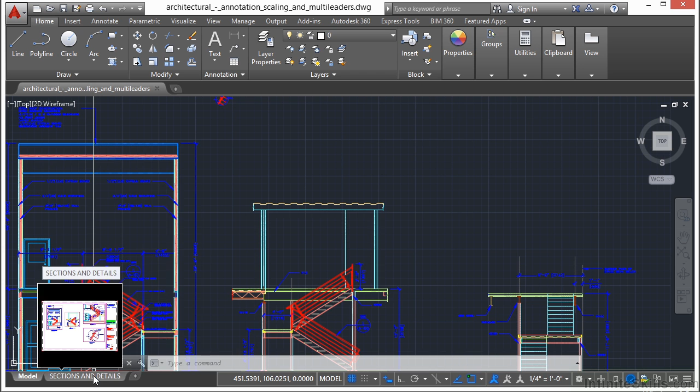So to start, we're going to make a new layout tab. To do that, just right-click on the layout tabs and click New Layout. That will create a tab called Layout 1. Page name is fine for right now. So let's activate that tab by clicking on it. Just go to it. And we have a viewport already set up.

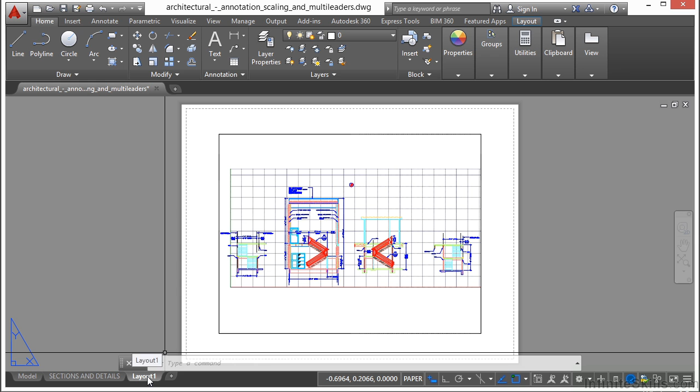Now let's go to the Page Setup Manager. It's real easy to get to. Just go down to your Layout tab and right-click on it and go to Page Setup Manager. Now this window allows you to either pick a page setup already in the drawing or make a new one. Any names that you see down here with asterisks on it, as we have here layout and sections and details, are paperspace tabs. Any others that you'll see can actually be assigned to it.

Right now we don't have any page setups in here. So in order to use our page setups, we're going to have to create a new one. So click on the New button. Let's give this a name. I'm just going to call it Page Setup Example.

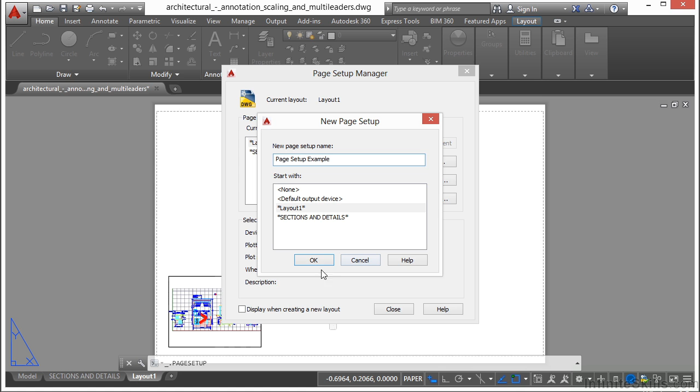Now what you want to do with the names is give it a name that defines or describes what's going on. So if you're printing a black and white 8.5 by 11, give it a name similar to that. Keep them short, but make sure they're clear and well defined so that anyone using them knows and understands exactly what it is you're trying to do with that page setup. So give it a name, click OK.

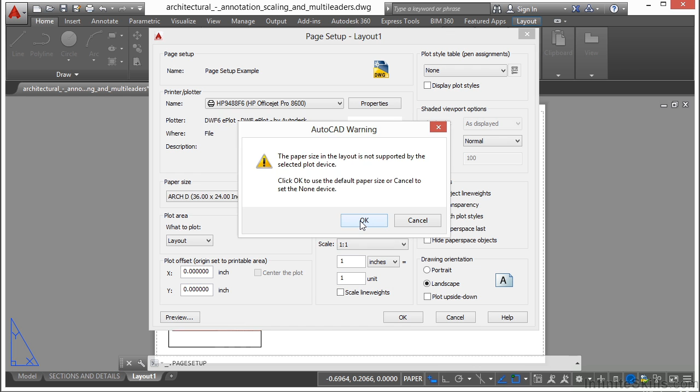Now we just go through all of the settings, just like we would when we were normally printing. So I'm going to pick my printer first. Since I only have one real printer to choose from, I'm going to pick it. And this gives me a warning. It says, hey, my page size is too big, and I realize that. I'm clicking OK, and it gives a description of what's going on here. Now I'm going to pick letter size for my paper size, and I want to pick extents. I want it to center the plot, and I want it to fit to the page.

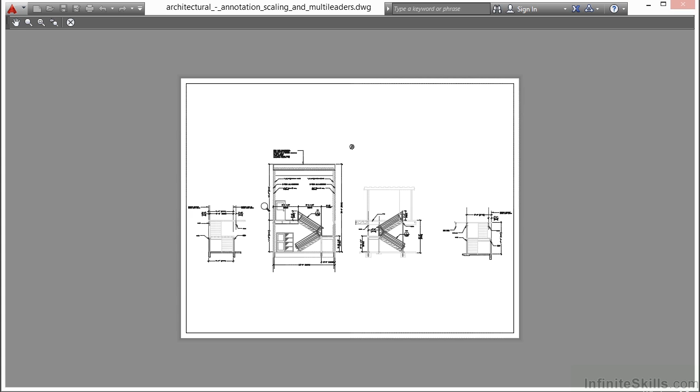When you're ready, click on this preview, and the preview button will show you exactly what it's going to look like. See, that fits everything into an 8.5 by 11 size sheet. Works perfectly for me. Now I can zoom in and out with my scroll wheel. I can also pan with my scroll wheel. Or if I right click, I can get to pan and zoom, or zoom window, or zoom original. Or when I'm finished, I just click exit.

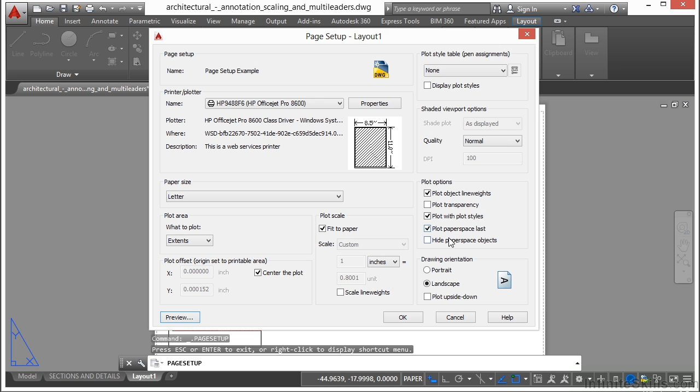Now when everything else is okay, make sure my portrait and landscape is set up. I'm not going to use a CTB file. Everything else here looks good. I'm going to click OK. And now my page setup has been created, and now I can apply it to this paperspace tab. So what I do is I select it, and I hit the Set Current button. Now when you do that, you'll see here it says Layout 1, and in parentheses it has the name of the page setup. That means it's been assigned to this paperspace tab.

This paperspace tab does not have a page setup at all. That's okay. I'm going to create one more, so I'm going to select New. Now you notice that I selected this page setup before I clicked New. This works just like it does in any of the other style creations, dimensions, text, etc. It will copy these settings, and then I'll just be able to tweak it however I want.

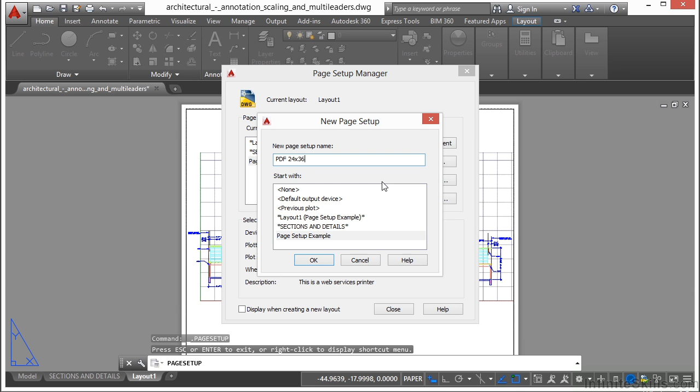Well, I'm going to call this PDF 24 by 36 because that's what I'm going to create. With this page setup, my drawings will be printed not to paper, but to a PDF file. And it will be full size, 24 by 36. So I'm going to click OK.

AutoCAD, by default and out of the box, comes with several settings. I have some programs that I use, like Snagit, OneNote, and Nitro PDF Creator, that will allow me to print to those file types. Also, you have a Microsoft XPS document writer. You should have that if you're running Windows, which you should be. If you have a fax printer set up, or your default Windows printer, you can print to those types of

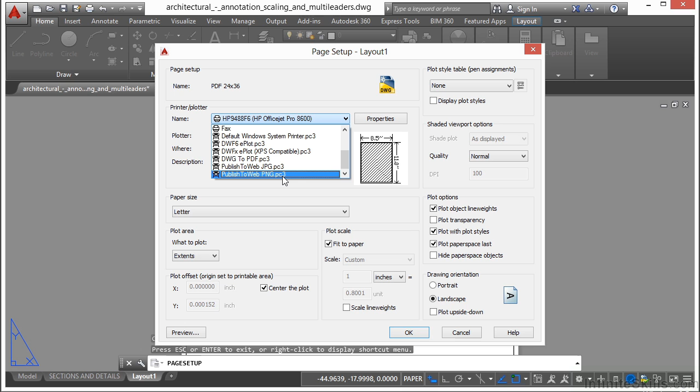files. AutoCAD itself comes with settings to print to a DWF file, a DWFX, a PDF, a JPEG, or a PNG file. And those are these options here. So instead of sending the document to a piece of paper, it sends it to one of these electronic file types. So this is a great way to share your drawings via email. Well, I'm going to use the DWG to PDF file.

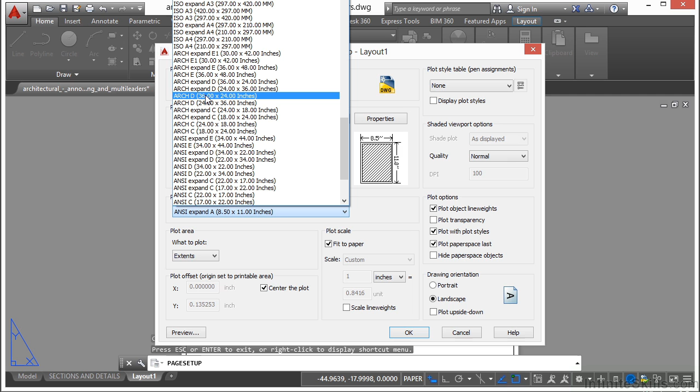I have a lot of options here available to me. Now, this is an architectural D size drawing, a 36 by 24 size sheet. Now, you see I have two options here, 36 by 24 and then 24 by 36. Well, this drawing is a 36 by 24 in reality. It's 36 wide, 24 tall. And the first number in your AutoCAD printing is what's going to be the width. So that's what I'm going to pick, 36 by 24.

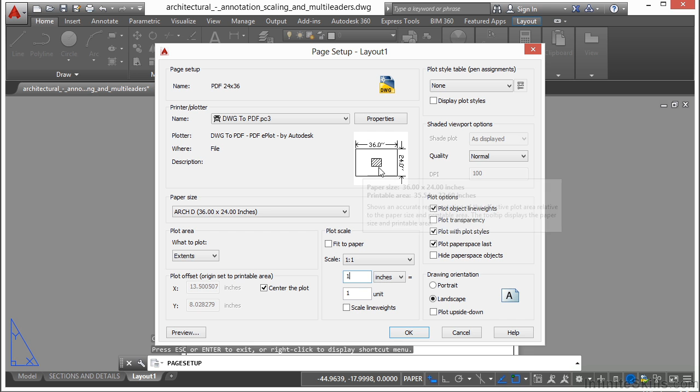Now I'm still set as the drawing to extents, and this is set to center. This is set to fit to paper. I'm going to turn that off, change my units to 1. And you can see here, this drawing is not really set up to be printed to that size. And you're going to find out that this happens to you quite often, where you think it's set up to be a certain way, but it really isn't. If I hit preview, you can see how small that is.

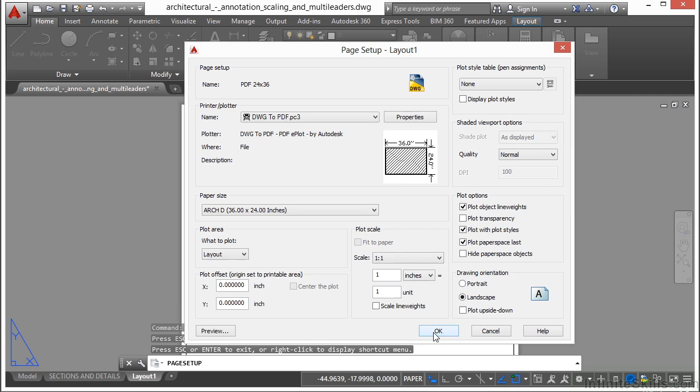What's happening here is that this paper space tab is set up to be 8.5 by 11. And that's okay, because I'm not going to apply it to this paper space tab. I'm going to apply it to this other one. So I am going to set up to layout 1:1. Now it's going to be 24 by 36 when I use this setting. I'm going to click OK. And now it's here as an option available to me. I'm going to click close.

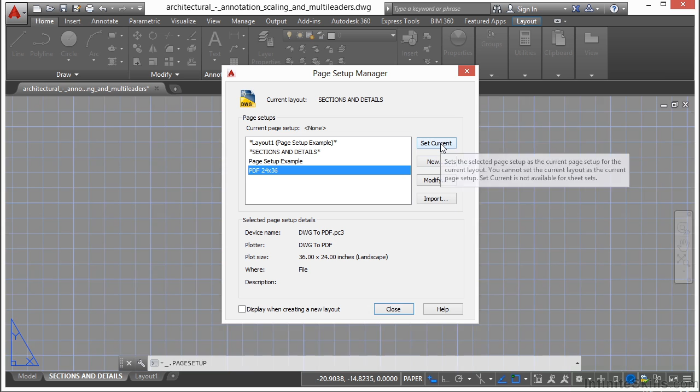I'm going to go to this paper space tab. I'm going to right click on it and go to my page setup manager. And for this paper space tab, I'm going to select my PDF 24 by 36, pick set current, and click close. Remember I talked about that dashed line? Here it is right there. That's the dashed line. So I'm going to have to reposition my viewport and my other drawing objects here to make sure it fits inside my sheet.

So I'm using the move command, selecting everything. Now they have these little guidelines here in this drawing, so I'm going to try to use that. You can see the white paper is right here. That also gives me a guide as to my paper size. Now you can't snap to any of those points, so you just have to kind of eyeball it. And once you do that, let's look over here, and we see that it seems to be fitting into everything, and we're good. Now we can save the file, and we can go on from there.

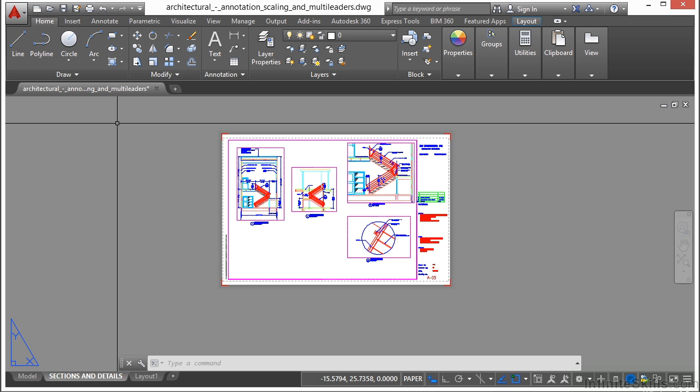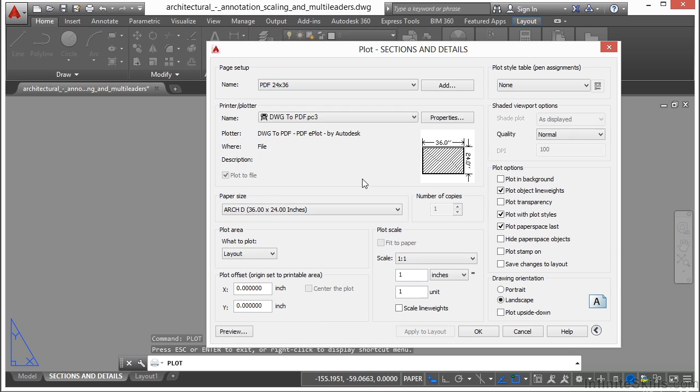Because now when I want to print, I just go to print, I find my page setups, I select it, I hit my preview, see that it works, right click, exit, and then click OK. I don't have to go through any of these settings. They all come up automatically for me, and I know they're correct. So it saves time and it makes sure you print correctly every time.